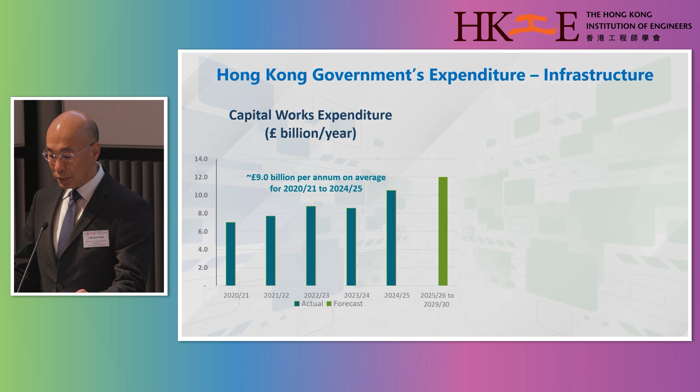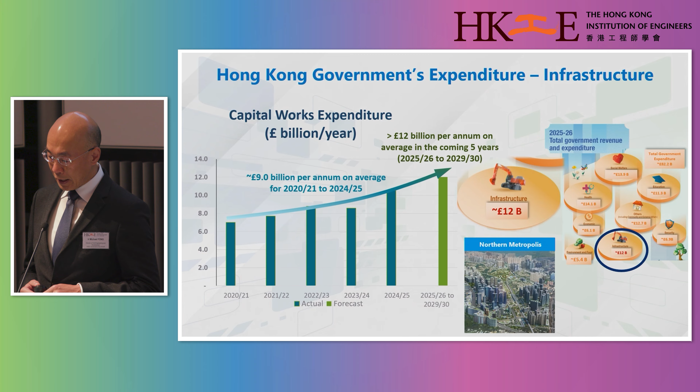With a huge volume of infrastructure works in the pipeline, particularly the development of the Northern Metropolis, which I will briefly talk about in a minute, the annual capital works expenditure in Hong Kong will increase from an average of around 9 billion British pounds to more than 12 billion British pounds in the next 5 years.

Under the overall national development, our national government has indicated clear support for Hong Kong's development into an international innovation and technology center. Under a new industry pattern of South-North dual engine, with finance at the south and I&T at the north, the Northern Metropolis will be developed into a new international I&T city, integrating quality life, industry development, culture and leisure, and green living.

My department has been tasked with the development of the Northern Metropolis. Let me show you a short video about this development.

The Northern Metropolis is a large-scale development project in progress in Hong Kong, building a new metropolitan area in the northern part of the city as a new economic engine, a livable community, and a quality platform for regional cooperation. Covering Yuen Long and North districts, the Northern Metropolis has an area of 30,000 hectares, about one third of Hong Kong's total, capable of accommodating 2.5 million population on completion.

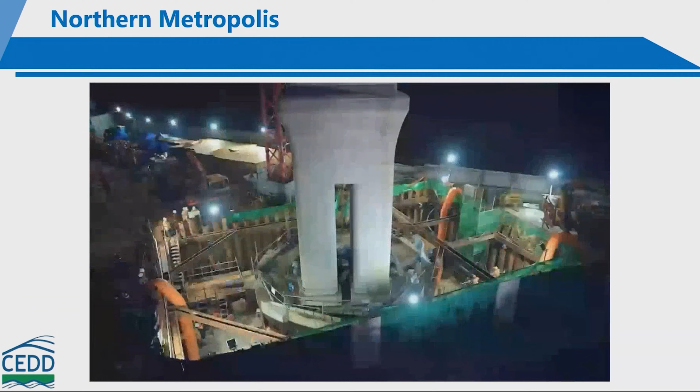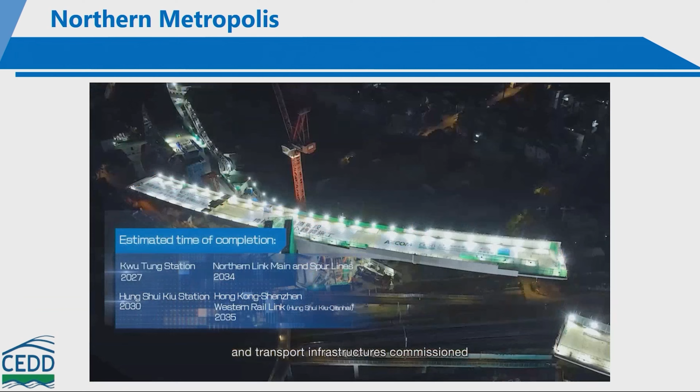Construction for new development areas are progressing at full steam. We adopt multiple development approaches to leverage market forces and expedite the development of the area. The project is gradually bearing fruits. The coming years will see more residential developments completed, industrial land ready, and transport infrastructures commissioned. Blending urbanization with nature, an ideal place for work and life—a new engine of Hong Kong's development, the Northern Metropolis.

We aspire to create vibrant, livable, and sustainable communities in these major development projects for our next generations. In order to achieve our vision and goal, we have adopted a set of smart, green, and resilient strategies in the development of the Northern Metropolis, including sustainable planning and urban design, integrated SGR infrastructure system, and smart and green mobility.

Let me briefly introduce some of the sustainable planning and urban design. First, we will adopt a 15-minute neighborhood concept for the planning of the living communities. Each community will have a green mass transit station at the center, with other public transport stations, daily shopping and dining facilities, community facilities, open spaces, etc., within 15 minutes reach, either by walking or cycling.

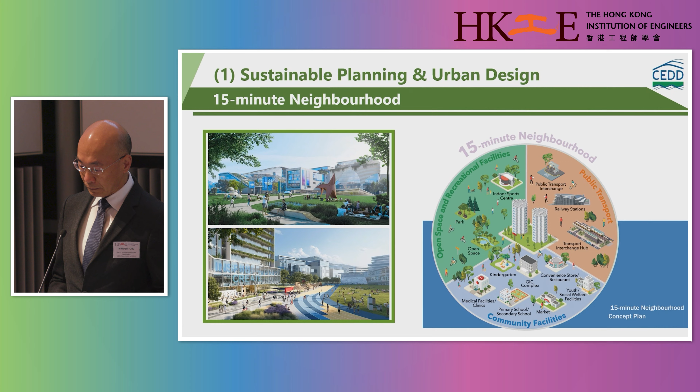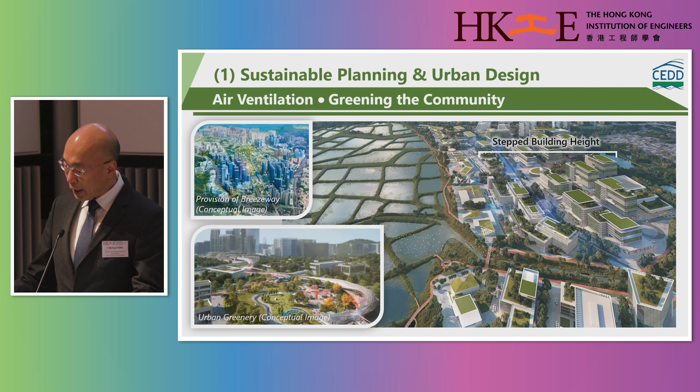In order to provide a healthy and comfortable environment, stepped building heights will be planned, and we will align the open space and breezeways with the prevailing wind directions. We also encourage buildings to adopt sky-rise greening, including rooftop greening, vertical greening, sky gardens, etc., to reduce heat island effect and lower energy consumption and carbon footprint of the buildings.

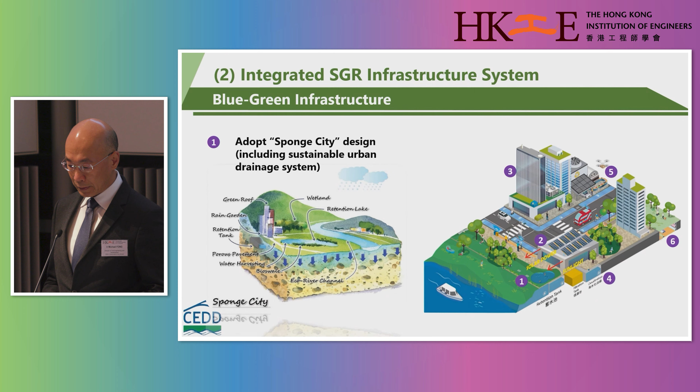We will provide a whole array of integrated smart, green, and resilient infrastructure systems, including sponge city design concepts, comprising sustainable urban drainage systems, such as porous pavements, bioswales, retention tanks, etc. We will put in place a comprehensive network of renewable energy facilities, in particular solar energy panels, to harvest clean energy to support the city operation.

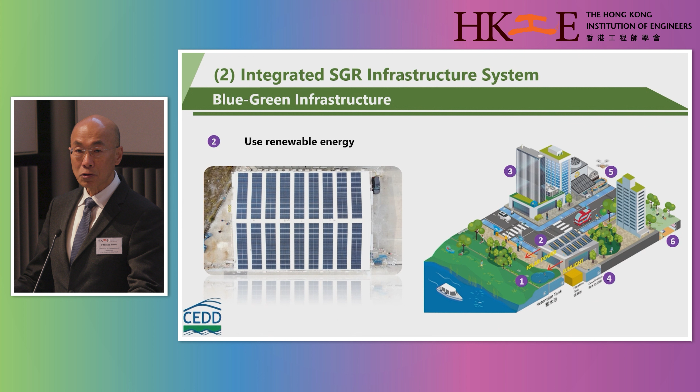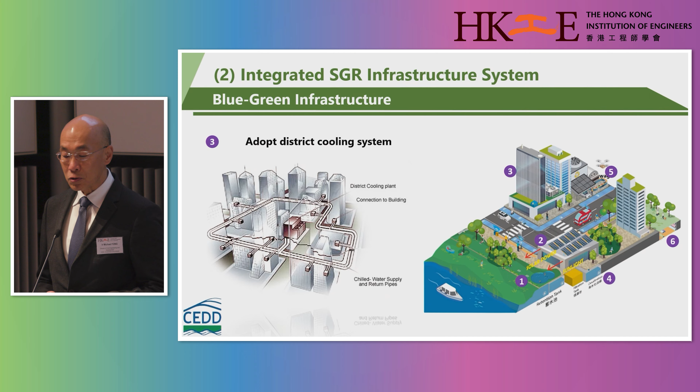We will also provide a district cooling system which has higher energy efficiency and lower carbon footprint to support the development, particularly the I&T industry.

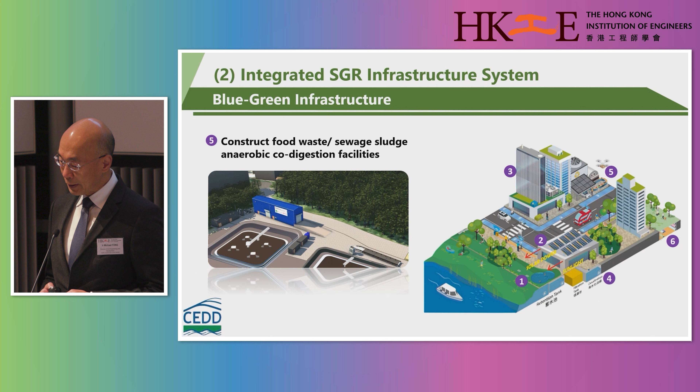We will construct food waste and sewage sludge co-digestion facilities that form part of the municipal infrastructure of our community for handling waste in an environmentally friendly manner.

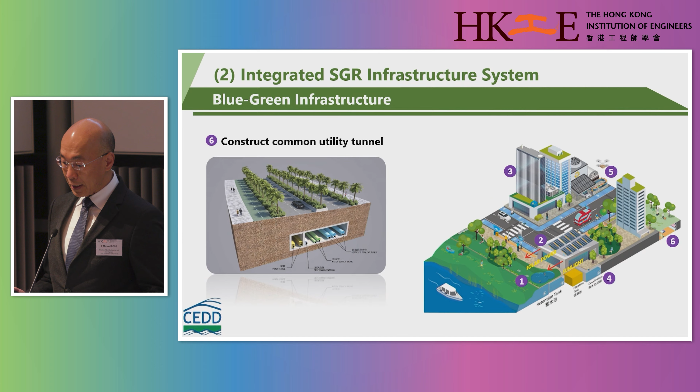Extensive common utility tunnels will be constructed to house various underground utilities. This common utility tunnel will effectively avoid public disturbance and the associated energy consumption and waste generation arising from road excavation for laying and maintenance of underground utilities.

The new development areas will adopt resilient designs capable of meeting the challenges of climate change and extreme weather.

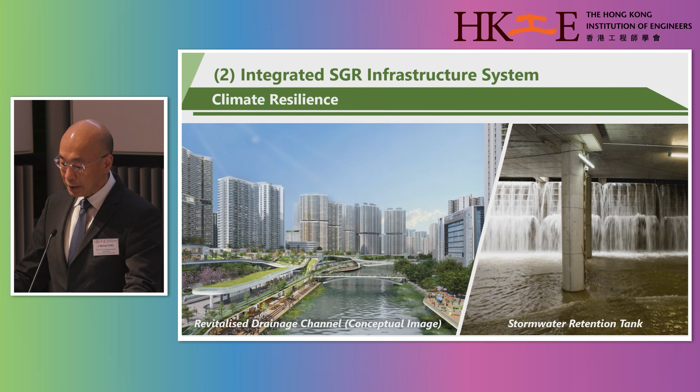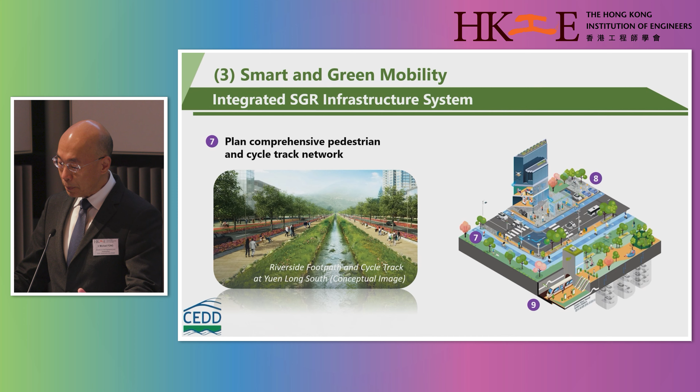For smart and green mobility, we have planned comprehensive pedestrian and cycle track networks to allow residents to travel by healthy modes, such as walking or cycling.

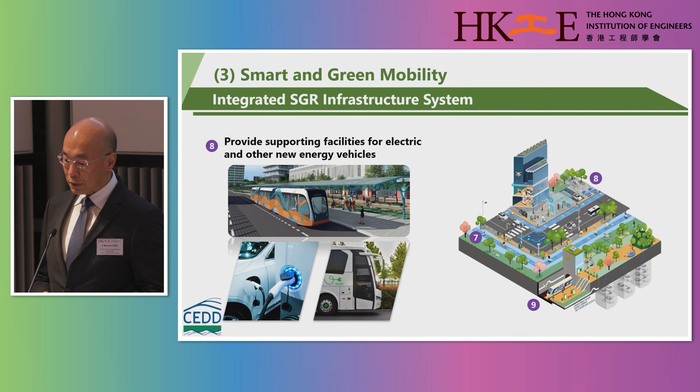Extensive supporting facilities for electric and other new energy vehicles will also be built in order to actively promote the development and use of new energy vehicles, to improve roadside air quality and reduce greenhouse gas emissions.

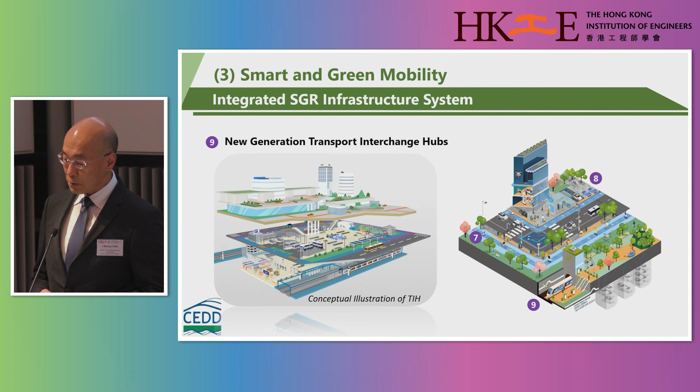Last but not least, new generation transport interchange hubs will be provided at strategic locations. They will become an important link between transport and development of neighboring areas by providing diversified one-stop transport facilities and ancillary facilities to enhance passenger travel experience, thereby improving transport services.

Just now I talked about our smart, green, and resilient strategies for our Northern Metropolis. Actually, over the years, my department has been working closely with universities and industry practitioners in developing and applying novel materials and technologies in our projects. Our aim is achieving better sustainable, green, and resilient development. Now, let me share with you some examples.

The first one is the use of what we call S690 high-strength steel in the construction of a steel bridge, the Cross Bay Link in Hong Kong.

Other than its functional purpose of coping with anticipated traffic demand in the district, we put forth the initiative of green commuting in the design of the project, combining functions of a road, cycle track, and footpath on the Marine Viaduct. We extend its green commuting by connecting it to the coastal cycle track of the existing bay, forming a coastal bicycle loop with a total length of about 5 kilometers.

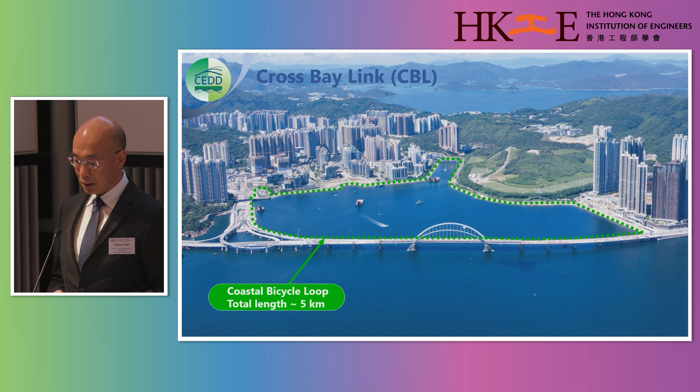Facing the demanding technical requirements, especially on the long span length of the bridge, CEDD, my department, has adopted advanced construction materials in the construction of the Cross Bay Link. We collaborated with the Hong Kong Polytechnic University for using grade S690 high-strength steel, the first time ever in Hong Kong, to fabricate the double-arch steel bridge.

The merit of using this high-strength structural steel is a saving of 4,400 tons of steel, as compared with using conventional grade S355 steel, resulting in cost saving and also cutting carbon footprint due to reduction of steel usage.

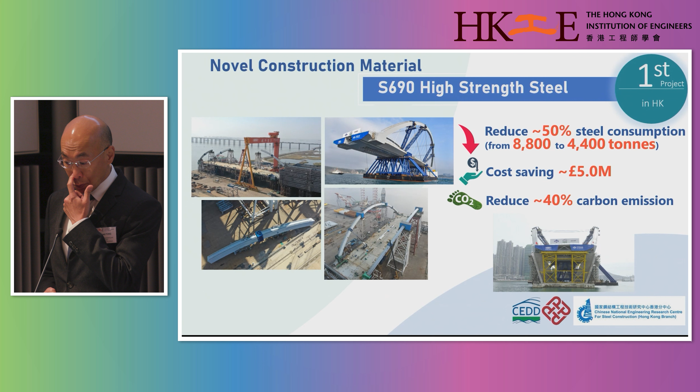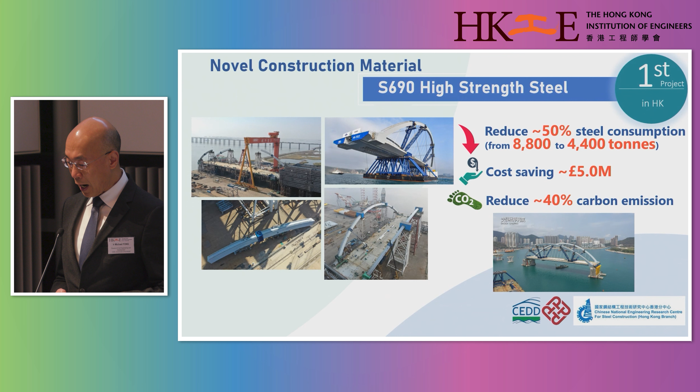As a result, the weight of the bridge was greatly reduced, therefore reducing the scale of the substructure of the steel bridge, as well as allowing the double-arch main segment to be prefabricated off-site, transported, and erected by using the float-over construction method, as shown in the video here, all in one go. The Cross Bay Link now becomes a major attraction in Hong Kong, not just for its appearance, but how we have promoted green commuting to our people.

We did not stop after the success of S690. We have taken the lead in developing the standard and design guidelines for S960 ultra-high strength steel, and used this material in the construction of 3 pedestrian footbridges under the Northern Metropolis. This is the first time in the world to use S960 steel in the construction of a footbridge.

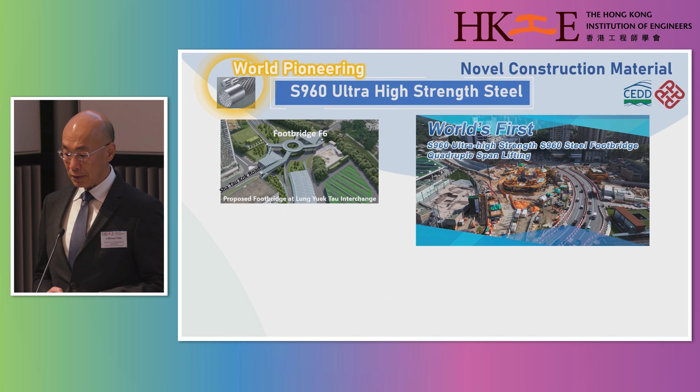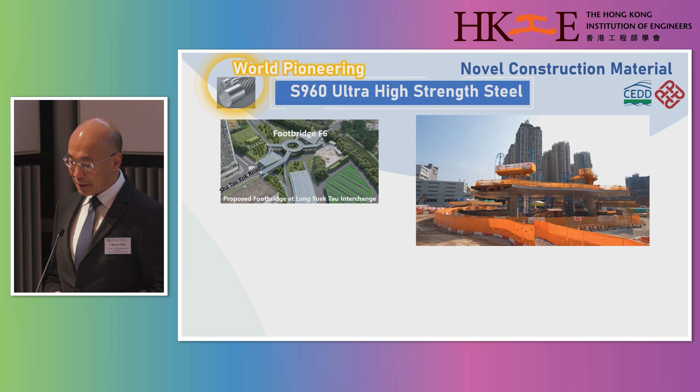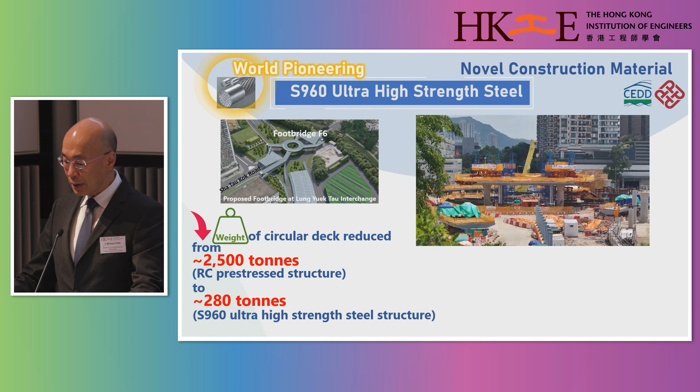The video on the right-hand side shows the lifting of the footbridge that we completed in July this year. Having a much higher tensile strength, the ultra-high strength steel significantly reduced the weight of the circular deck from 2,500 tons under the original RC prestressed structure design to some 280 tons only, a reduction of over 90% in weight, thus reducing the number of foundation piles and leading to a decrease of about 30% in the overall construction cost.

It also helps reduce carbon emissions for the works. In addition, components made of S960 steel were prefabricated in factories, which not only significantly reduced the number of on-site procedures, but also enhanced site safety, improved construction efficiencies, and shortened the overall construction time.

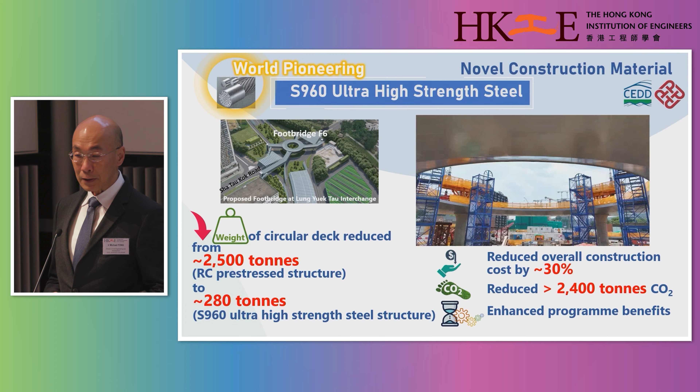Another novel construction technology adopted in bridge construction is the horizontal bridge rotation method, used in another project of the Northern Metropolis.

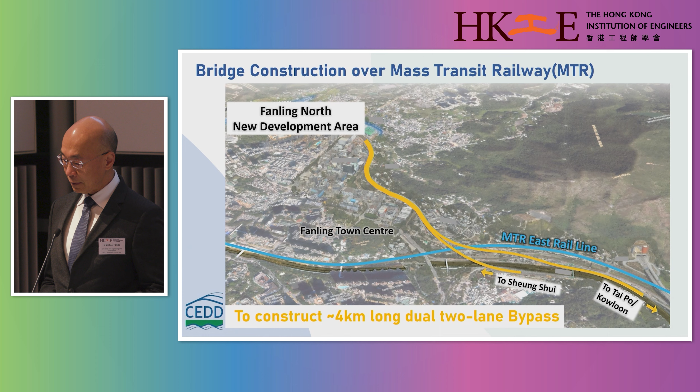The project involved the construction of an approximately 4-kilometer long dual-two-lane road link, comprising viaducts, at-grade roads, and underpass sections. We introduced the bridge rotation technology, the first of its kind in Hong Kong, in the erection of 2 bridge sections over an existing railway line. Here it shows you how the works were done.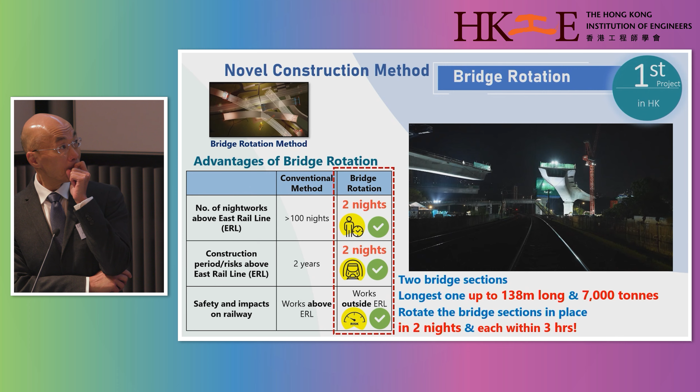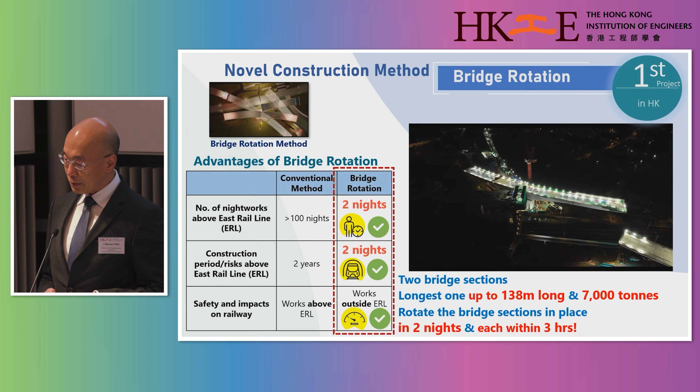The innovative rotation of 2 bridge sections, with the longest one up to 138 meters long and 7,000 tons in weight, was successfully completed within 3 hours in the midnight. Compared with the traditional method, this innovative method significantly reduced the number of nighttime operations above the railway from over 100 nights to just 2 nights. Our success was not only in time and cost saving, but also significantly reduced the risk of construction above the railway.

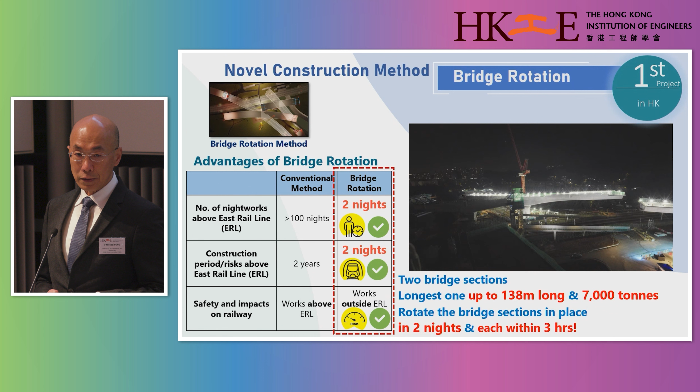Another example of a novel construction method adopted in our tunneling works is the use of a rectangular TBM in a construction project in our urban area. This project involved the construction of a 140-meter subway located in an area congested with many existing underground utilities, viaduct foundations, and large water-carrying conduits, imposing great technical challenges on the construction works. To overcome the challenges, we brought in Hong Kong's first RTBM, the rectangular TBM.

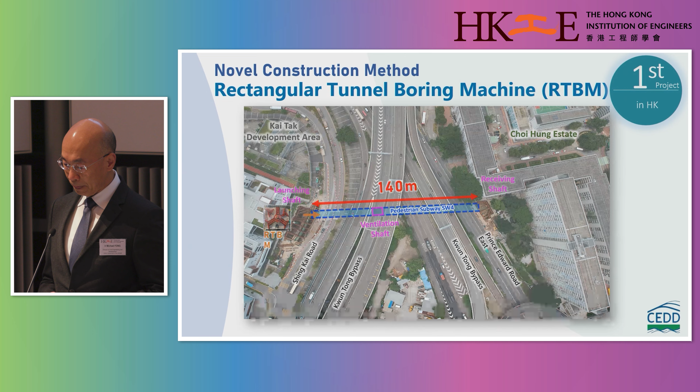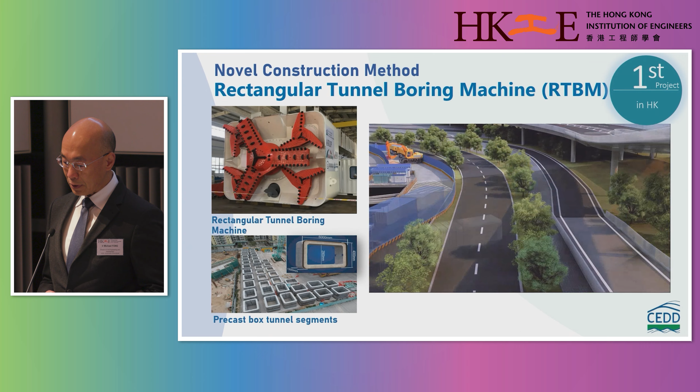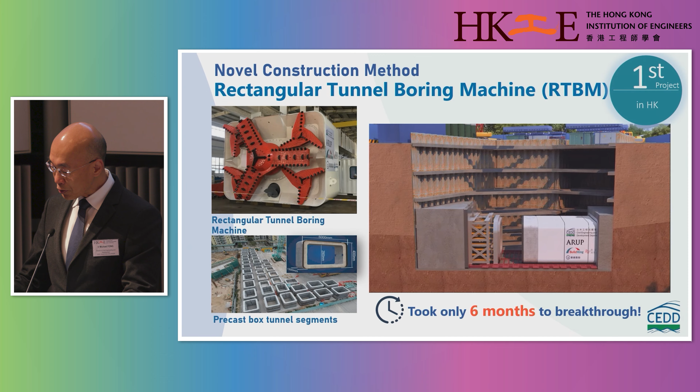The rectangular TBM cutter head was equipped with 1 main and 4 auxiliary cutter discs. Tunnel excavation was integrated with the installation of precast tunnel segments, 92 pieces in total. The segments constituted the permanent structure and supported the adjacent ground during tunneling construction. It took only 6 months to break through. This tunneling machine not only minimized construction risks and environmental impacts, but also enhanced works quality and productivity.

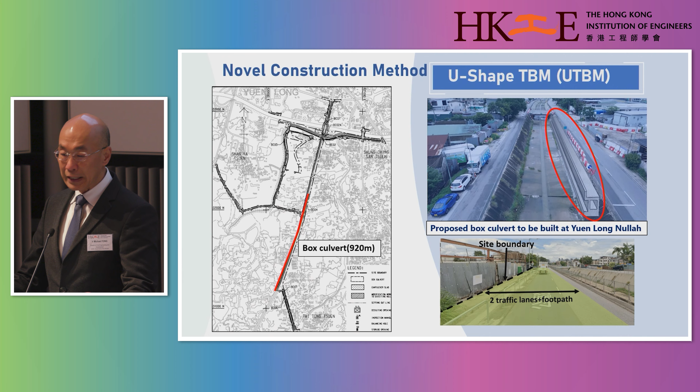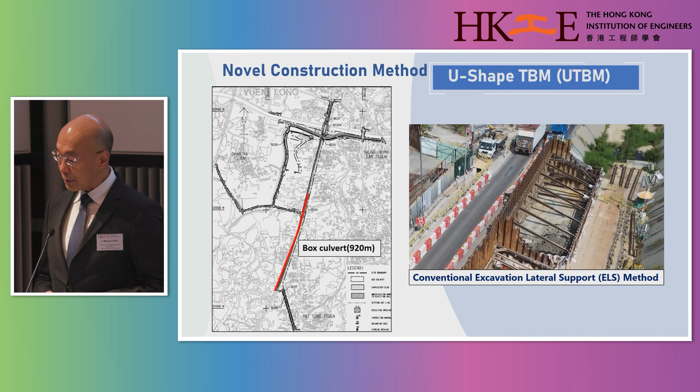Other than the rectangular TBM, we use U-shaped TBM, again the first of its kind in Hong Kong. Under another project of the Northern Metropolis, a box culvert needs to be built alongside an existing engineered channel next to an existing heavily trafficked road. If conventional ELS is adopted, compressed multi-stage temporary traffic arrangements have to be implemented to spare sufficient space for the box culvert construction. As a result, the production rate will be less than 1 meter per day.

The UTBM is thus proposed. The UTBM incorporates cutting-edge technologies for module manufacturing and the pre-assembly of an open-cut tunneling machine. The video on the left shows how the UTBM operates. The U-shaped shield structure operates at channel bed level, allowing space for open trench excavation in front and precast unit installation at the rear. The UTBM requires smaller working space, so the existing two-lane traffic could be maintained throughout the construction period.

Compared with the conventional ELS methods, the UTBM can advance at a remarkable rate of 6 meters per day. It significantly expedites the completion of the box culvert by 400 days.

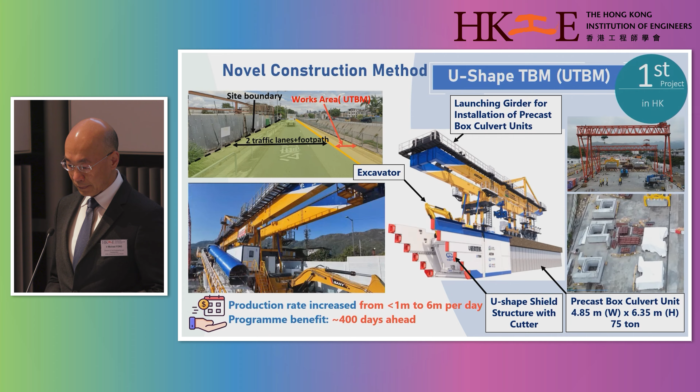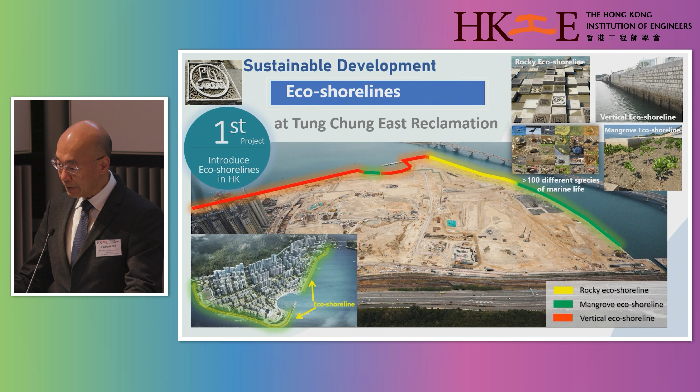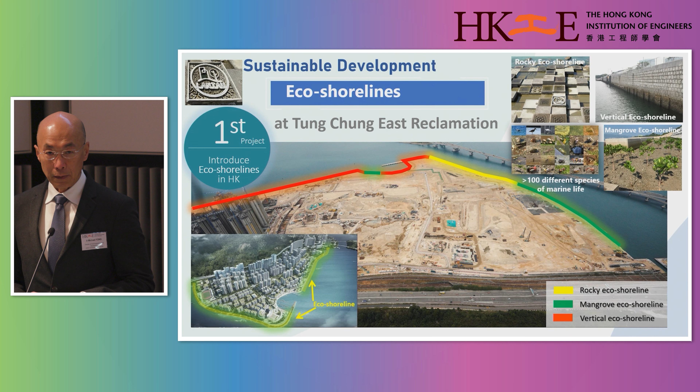When we plan our infrastructure, we take nature and conservation to heart as well. One example is the construction of eco-shorelines in a reclamation project that we completed recently. We introduced a total of approximately 3.8 kilometers of living shoreline, comprising rocky shoreline, mangrove eco-shoreline, and vertical eco-shoreline, creating different topologies for access to the seafront and mimicking naturally occurring coastal landforms for marine organisms, thus enhancing biodiversity and creating a vibrant water-friendly culture along the promenades.

Other than the eco-shoreline, my department is also piloting the Urban Mini-Forest Initiative in the Northern Metropolis with a view to enhancing the biodiversity of the built environment.

In order to implement this initiative in a more structured and systematic way, we are developing a nature-based solution guidebook, which aims to facilitate the adoption of nature-based solutions in our projects and ensure they are designed in a consistent manner. We have reviewed relevant literature and publications to understand global experience and practices, identifying what we can incorporate and improve to better suit the local context in Hong Kong.

Because of time constraints, I'm sorry I can only share a few of our initiatives and work with you today. But all I can say is that my department has been embracing innovation, not just in advanced construction materials and technologies, but also with equal focus on nature conservation.